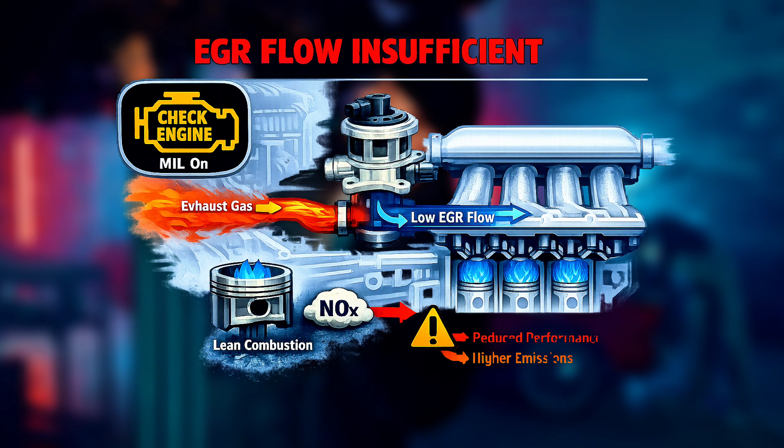Check engine light on. Is your OBD2 scanner showing a P0401 code for EGR Flow Insufficient? Don't waste hundreds of dollars replacing parts unnecessarily. In this video, I'll show you two simple DIY fixes to resolve the P0401 code in minutes using just about $4 worth of cleaner. Let's get started.

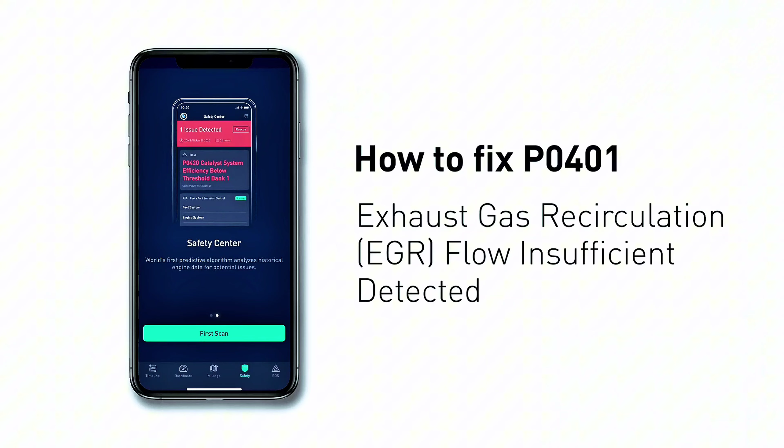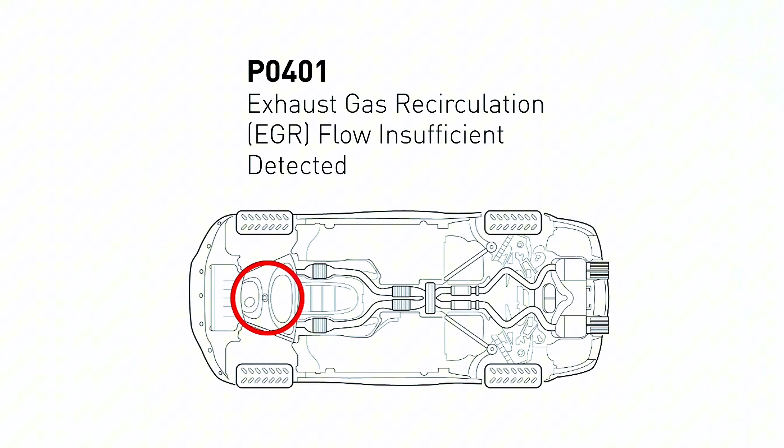If you're dealing with a P0401 error code, this video will guide you through two practical at-home solutions to fix it. First, use the Zeus app to scan your vehicle and confirm the P0401 code. This code indicates that the engine control module has detected insufficient exhaust gas recirculation. Essentially, the system expects a specific flow through the EGR valve when commanded to open, but isn't receiving it, which suggests a blockage or a faulty component.

Here are two simple, cost-effective DIY methods you can try to resolve this issue yourself. Method A, the EGR valve.

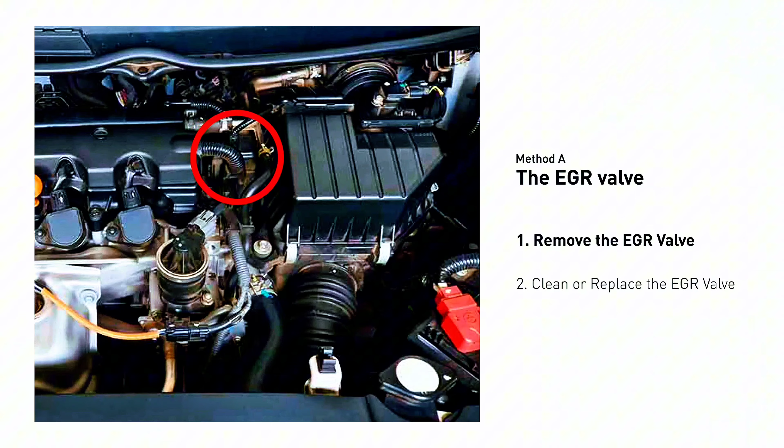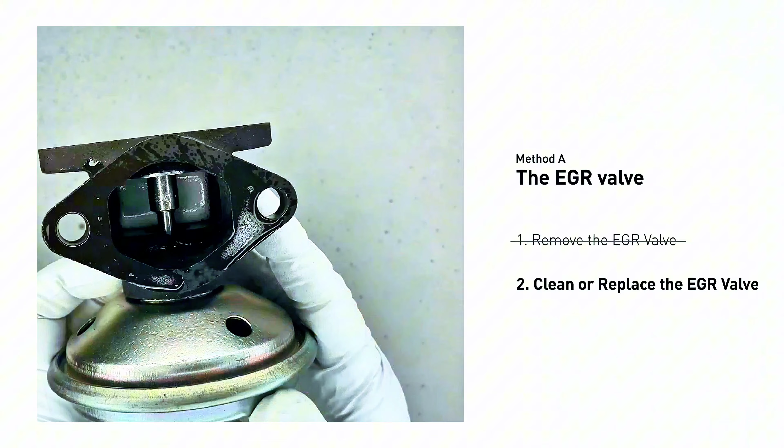Looking at the engine from the front, you can find the EGR valve towards the rear, located just to the right of the engine center. To begin, carefully remove the EGR valve from your engine bay. Turn the EGR valve upside down and fill the port with a high-quality carbon cleaner or penetrating solvent. Let it soak for about 5 hours to allow the solution to dissolve the carbon buildup. Once the valve has been cleaned and is completely dry, reinstall it in your vehicle. If the unit is too heavily clogged or damaged to be restored, you should simply replace it with a new one.

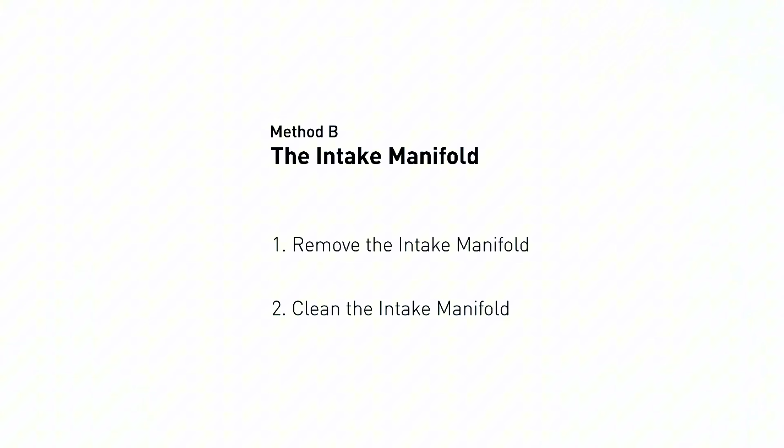Method B, the intake manifold. The intake manifold sits atop the engine, serving as a critical component in the combustion process by distributing the air-fuel mixture evenly to each cylinder.

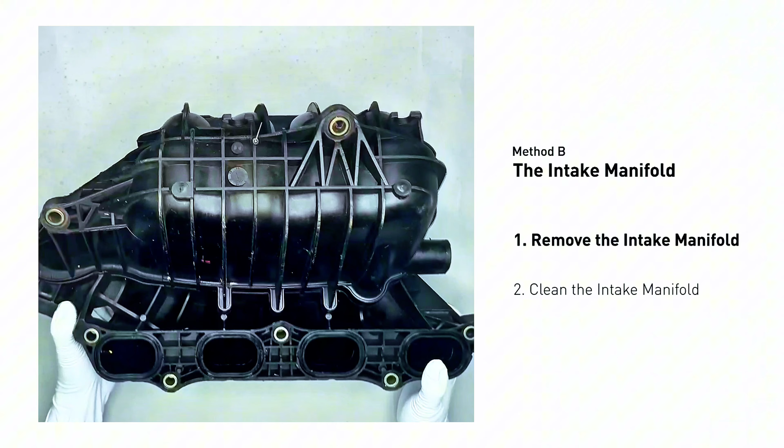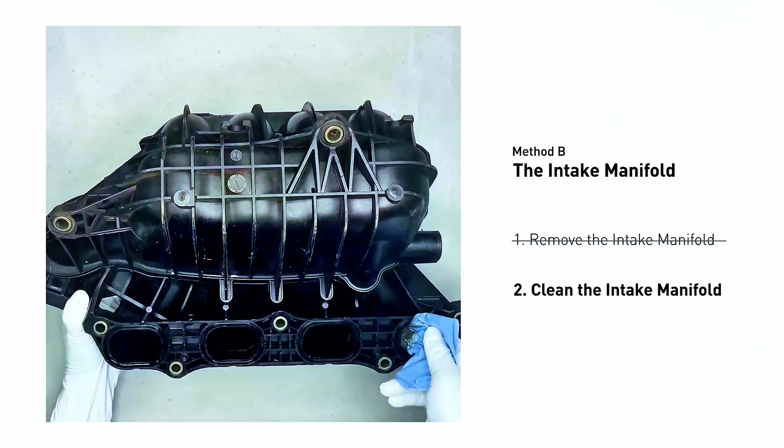Next, carefully remove the intake manifold from the engine. Be sure to work slowly and keep track of all bolts and gaskets, as this is a precise process. Use a suitable intake cleaner or degreaser to break down the carbon buildup inside the manifold. Wipe it thoroughly to ensure all residue is completely removed. Once the manifold is clean and dry, carefully reinstall it back onto the engine.

Once the repair is complete, open the Zeus app to clear the error code. Then tap the rescan button to verify that the system is clear and your vehicle is running perfectly.